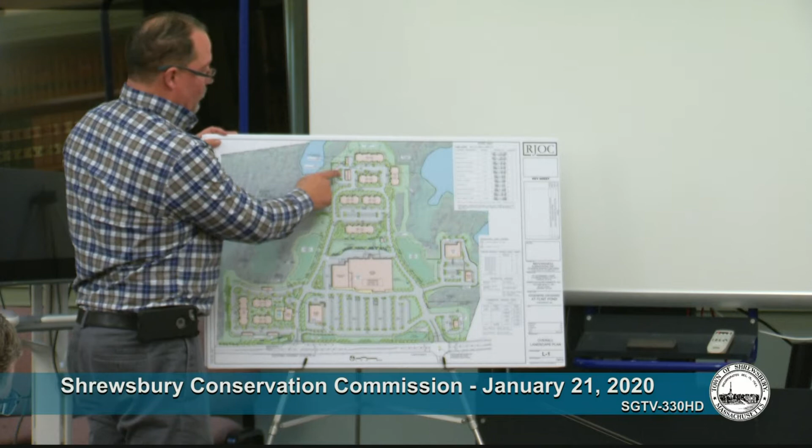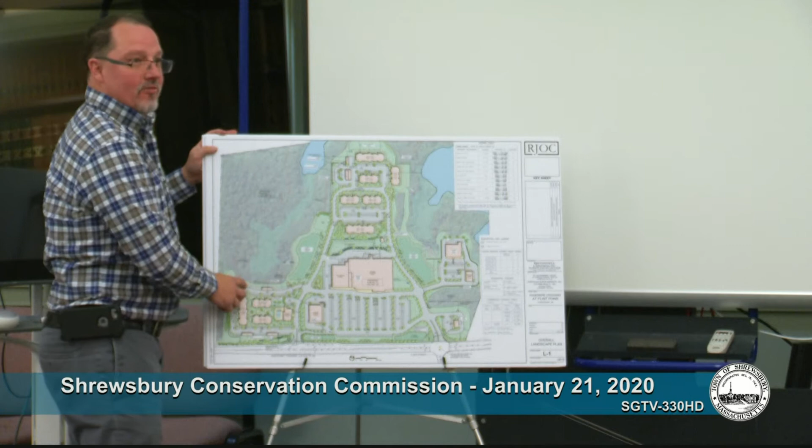Where are those 46 spaces? There's 46 in total. If you look at the current plan, there's 21 we refer to as reserve spaces on the east side, next door to this retaining wall - they kind of grade out there. Then there's another 14 and 11 spaces down near the eastern residential, also referred to as reserved spaces.

So if we issue the order of conditions referencing these plans, and you begin construction but don't build those parking spaces, the order is only good for a certain number of years. If they're not built within that period, you'd have to come back and refile, because we sort of lose control once we issue a certificate of compliance.

The point I was making is that while right now they don't show as a paved area, if the determination is made during construction to build them, all the erosion and sediment control is already in approved plans, so we wouldn't be coming back for that - it's only going to be a surprise if unpermitted. Okay, let's go to the public for any questions or comments on this hearing.

Seeing none, okay, so the board's all set. Does someone want to make a motion?

Mr. Chairman, do you want me to submit the copy of the December 26th Graves letter so you have it as part of your record, which includes the comments we still have to address? Sure, that'd be fine. So we'll close this hearing and act on it tonight.

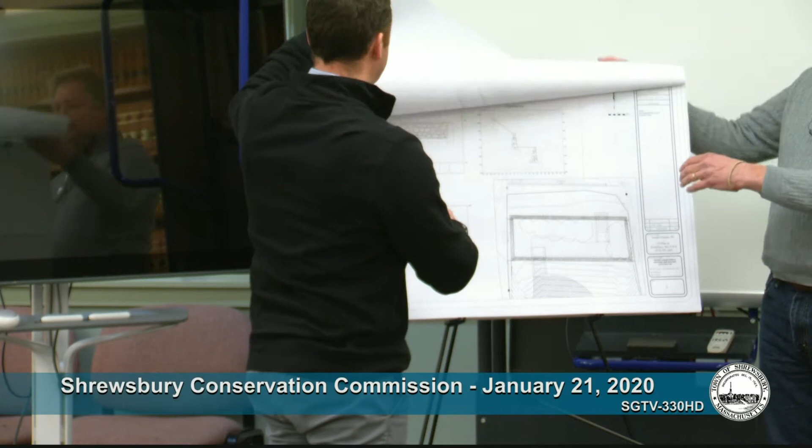Can you describe those new walls? I see the footing—is that just a crushed base, a stone base? I can go to this previous page that has the detail. There's actually a concrete base at the bottom, 4 feet down, and then it's built on that base.

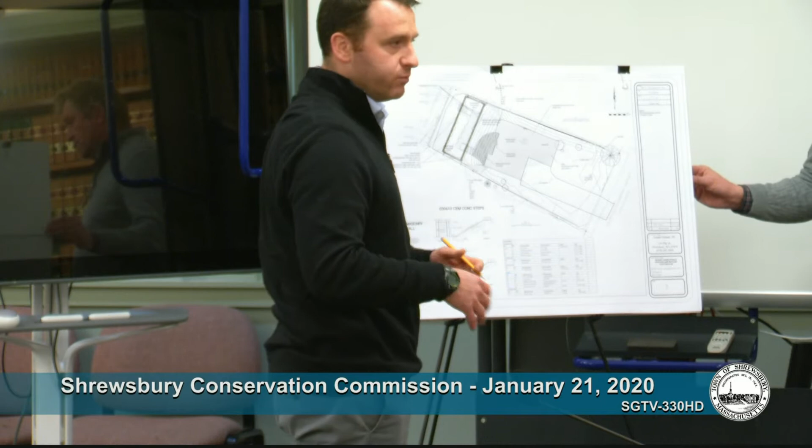With field masonry stones and pointing, and weep holes—4-inch PVC weep holes every 20 feet—with crushed stone backfill behind it to provide free draining, so we don't have any hydrostatic pressure in that wall.

They're going to require a building permit and structural engineering submittals, correct. Yep, which is beyond the scope of what Reese has asked us to do. But to do it you'll need that. But don't we need to see that?

Unless we condition it, you know? I think it should be on our plans. If you mean if it changes from this—well, this just shows a generic stone wall with a concrete base, you know. What if it goes to a Versa-Lok wall or something?

As long as the dimensions don't change. I mean, conservation has to sign off on the building permit, so Brad will be reviewing it when it gets submitted. We will be able to check it. We can condition it to be stone—his intent is to stick with the stone and keep it in kind.

Ready for questions? Martha, it looks like you're doing some grading, moving things around—are you planning to bring in any fill? No, there'll be some backfill structures for this wall because existing soils aren't sufficient, but outside the limit of this wall, there will actually be more excavation than backfilling, because some of the site is a little lower than existing, in order to make up the difference in the wall and reduce the slope.

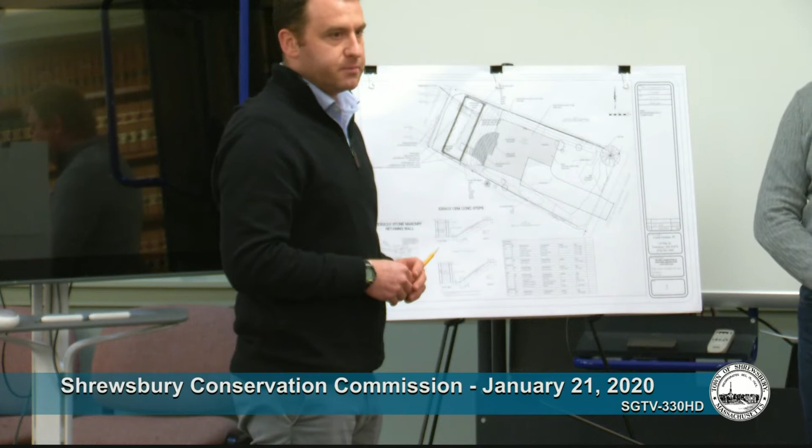But right now it'll stay in place. Right now he's just going to do interior renovations. So he's not putting a new house in now? All right, there was... okay. Or are we still writing the order for the demo of the existing house?

Well, I wasn't sure, because at one point they were going to not put a new house on the site, so I just wanted to make sure. But we don't have plans - well, they have a proposed footprint. It says proposed building, that's why it gets confusing, because if they're keeping the existing house, then that's not what they're building, so we need to clarify. Referencing these plans as the approved plans. But they don't have to build it. No, they don't have to.

So let's write it for the demo and the proposed building. Then, in 3 years, if they haven't done it, they've got to come back. And the other thing, obviously, that will require the stormwater permit under the town bylaw, so you will have to add some drainage to the site to meet that.

Andy, yeah, those are the three big ones really. So the issue with the wall that's on the water - that would have to be conditioned to be rebuilt during drawdown, correct? Yes. So we can put that in the order? I think yes. Perfect.

Looking at my notes from last month, we were talking about showing on the drawings any water lines, sewer lines, and footing drains for the proposed building. Did that ever get addressed?

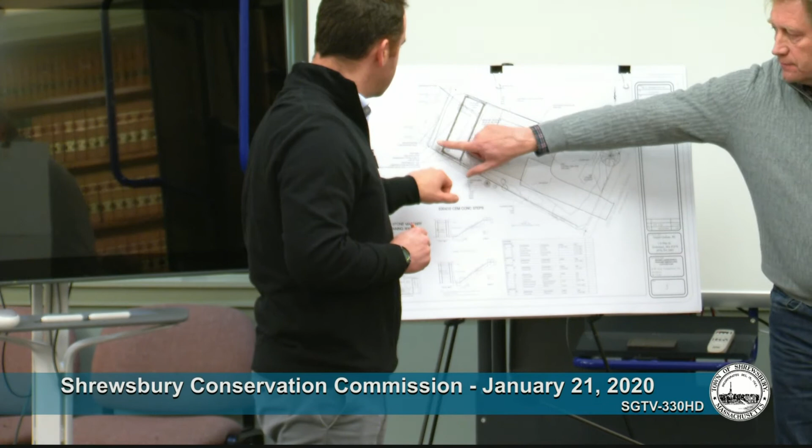I think we want to start here. Yeah, so the plan is to start here, grade everything. If he has to come back to stabilize, like loam and seed, he'll have to do that by hand. But all right, so you probably won't be doing any of this work till next fall?

I think the intention is to, depending on weather—obviously it's too cold right now—do this work now in order to take advantage of the timing. When do they put the boards back in? The lake starts to come up at the end of February.

Yes, I can. And as part of that PE-approved wall, the new walls, it looks like you're going to need railings because of the height. Correct, so that's going to have to be part of the condition work—that you have railings up there.

Are we all set here to go? I just have one more thing. The reason we're at this point is because the site was supposedly stabilized in the fall. If we get into a situation where they start work and leave it, and they disturb it again, he's going to have to keep stabilizing that and put the erosion control up and maintain it.

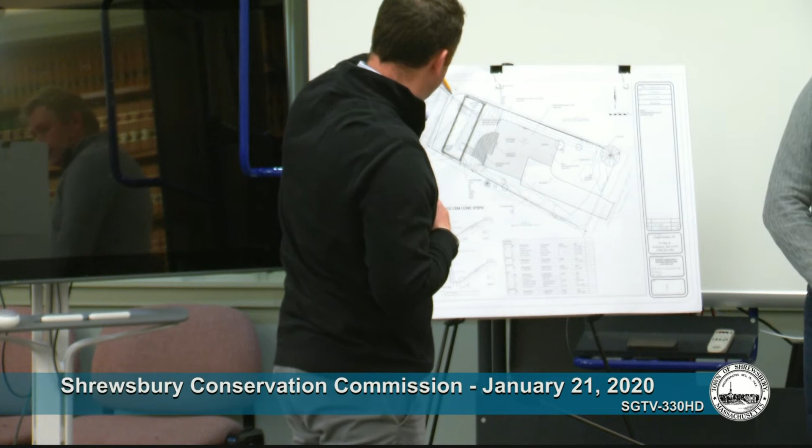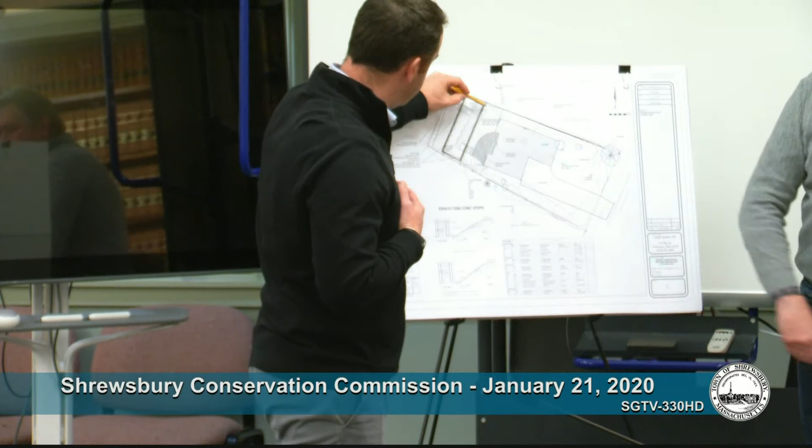Is the erosion control shown on this plan? It's a compost filter tube type of line that goes around here, around the whole site. I thought we had asked for one to be somewhere midway, above the other wall, above the second wall—is that shown there? We'll have to add it, we can add that, I missed it, because we'll have to update the plan with the change to the red maple. Okay.

All set. Does anyone in the public have any questions or comments on this hearing? All right, seeing none, we'll close it.

So, Thank you. Thank you. you're welcome.

New one, right? This is a new one. Okay, we have a new public hearing.

Notice is hereby given in accordance with the provisions of General Laws, Chapter 131, Section 40, that John Power, 21 Rich Street, Worcester, Mass., has filed a notice of intent for the demolition and reconstruction of a single-family residence at 246A South Quinsigamond Avenue. The public hearing will be held on the above notice at 7 PM on Tuesday evening, January 21st, 2020, in the Selectmen's Meeting Room. Good evening.

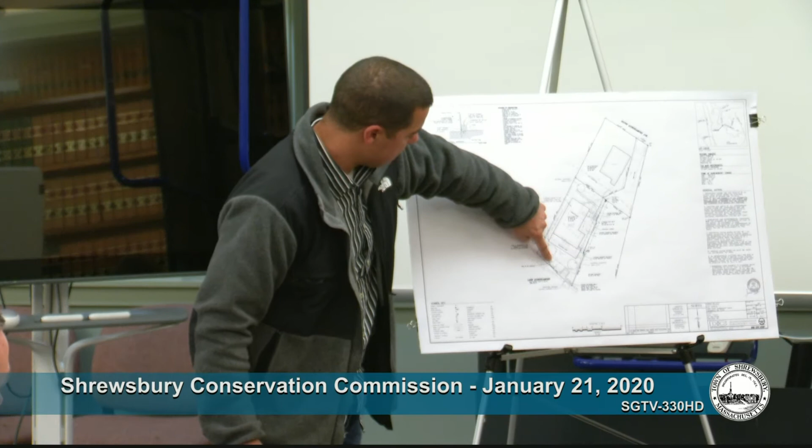Okay. There is one additional item too that we did add to this plan - there's an oak tree located near the retaining wall, right here, a little ways up from the edge of the water, that he's proposing to remove as well. That was not on the original plan. That's on the new plan - yeah, I have 2 copies here.

What's the reason for removing it? Two times that I'm aware of, the retaining wall has gotten pushed in because of the tree. It's a beautiful tree. I wish I didn't come to the decision that I'd like to remove it. My grandfather planted that in the 1940s.

The seasons and change colors, it's very pretty. But on that slope, on that side of the lake, I've seen so many times a healthy tree just falls in, takes out the retaining wall, takes out your neighbor's boat and his dock too. There's three trees, two big ones and one smaller one. I'm keeping the other two. I just want the one that is gonna push the retaining wall in eventually removed. There's permission to take that out.

Ken, do you have any concerns about the roots when that tree comes down? You mean where it's growing into the wall? Yeah, you can see it's happening to our walls now too. It's a problem. I hate to see the tree go, but I understand why.

So when you take the tree down, I assume you'll do that when you're repairing the retaining wall? Yes, the absolute first thing we would do is take the tree down. Then it would be rebuild the retaining wall, fix it, strengthen it, and work our way from the lake backwards. Will you remove the trunk and the root system? Yes. Anything that's gonna interfere, everything's gonna get removed.